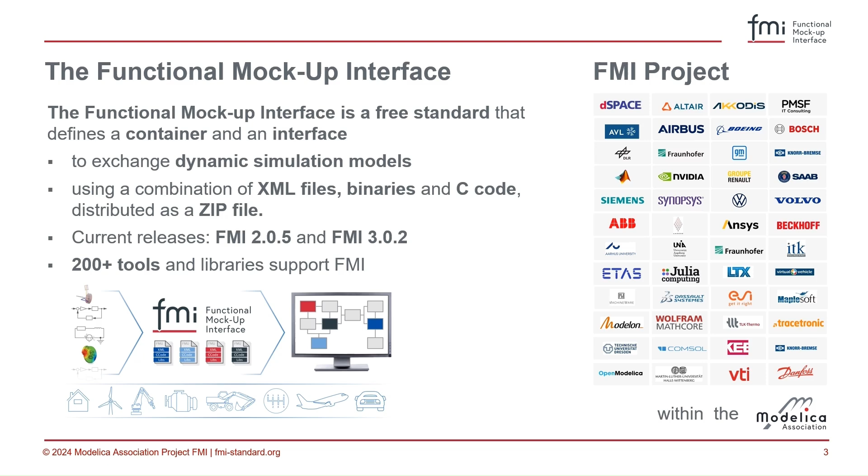While FMI 2 is still broadly used, FMI 3, which was released 2 years ago, brings important improvements. These were driven by the advanced usage of FMI in new domains beyond the classical continuous dynamical system simulation, such as virtual ECUs, advanced co-simulation, AI models, and optimization.

You can categorize the new features into performance and accuracy improvements, such as event mode in co-simulation, and features for new applications, such as grouping of signals in terminals. And some features belong to both categories, such as clocks to synchronize discrete events, new variable types as needed to represent embedded software, binary variables, and arrays. And very important for today's talk is the preparation for domain-specific extensions in the form of layered standards on top of the core FMI standard.

In order to keep the core FMI standard manageably small, we have foreseen in FMI 3 extension mechanisms for new applications. They can be released in form of layered standards on top of the FMI standard and can be defined not only by the FMI project, but by any organization. In the FMI project, we currently develop 4 of them for XCP support, for structured data, network communication, and validation experiments and related files.

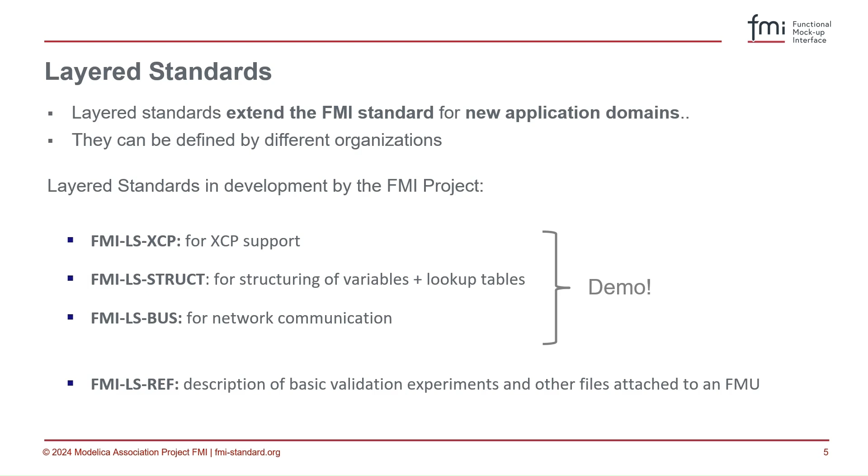FMI LS XCP defines support for the XCP protocol from ASAM. The first version of this layered standard was just released this week at the FMI design meeting in Munich. A2L files are packed into the FMU together with a manifest file that describes the capabilities with respect to XCP support. Then a measurement and calibration tool can automatically connect to the FMU representing a virtual ECU instead of the real ECU.

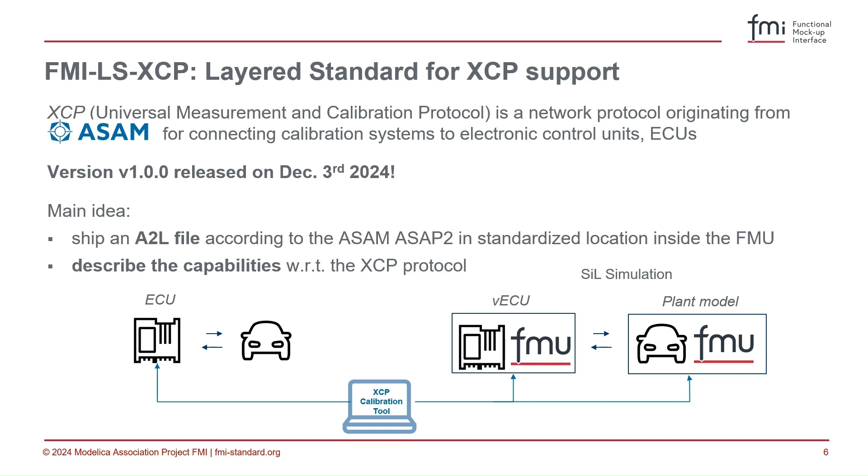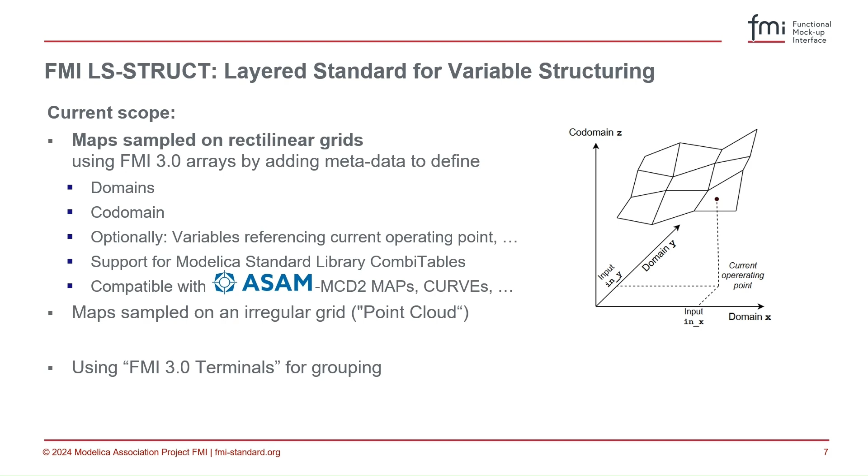FMI LS-Struct is a layered standard for the structuring of variables. Especially it describes how to use several FMI 3 array variables to represent maps that are sampled on rectilinear grids. In 1D and 2D, this corresponds to maps and curves in the corresponding ASAM standard. Also other kinds of variable groups, such as maps on irregular grids, can be defined. The FMI 3 terminals are used for the grouping.

FMI LS-Bus describes how to realize network communication for virtual ECUs with FMI 3 features, such as clocks, terminals, and binary variables. Especially the protocols CAN, LIN, FlexRay, and Ethernet can be defined. It uses the given network description files, such as DBC, LDF, FIBEX, or ARXML. Two variants have been defined. The high cut uses physical signals and clocks on the transport layers. The low cut defines the emulation of specific bus systems to realize virtualized bus driver implementations.

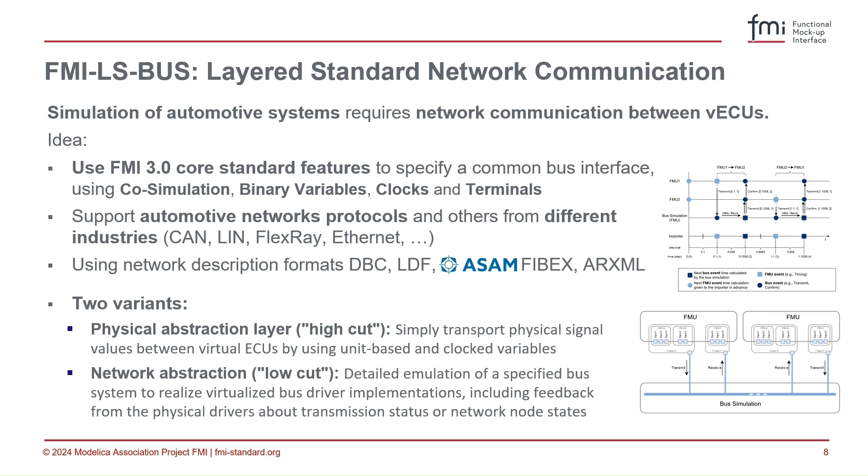FMUs with FMI LS-Bus support can be simulated in three ways. On the left, we see the simulation of two virtual ECUs with an idealized bus in a one-to-one connection. This can be simulated in a standard FMI importer without special bus simulation capabilities. To simulate bus effects, two variants are possible.

In the middle, we use a bus simulation FMU. With this, a standard FMI importer with no special bus simulation capabilities can be used to simulate bus effects for multiple connected virtual ECUs. On the right, we see a simulation tool with special bus simulation capabilities to simulate the bus effects.

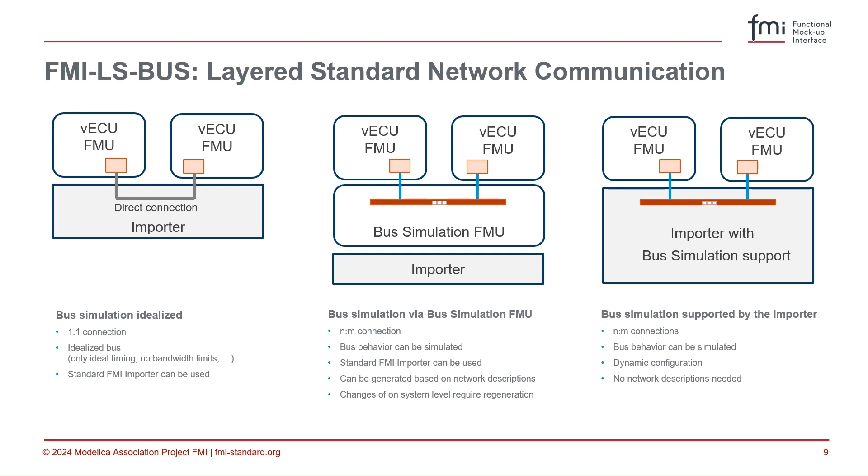We will now demonstrate the high cut with an example for the closed loop simulation of a fuel injection system with an engine control unit and a transmission control unit. It will be presented by Klaus Schuch from AVL.

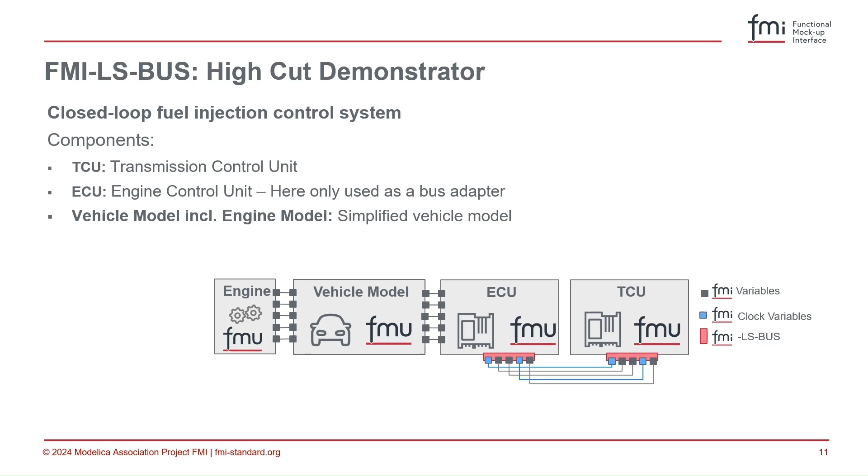Hello, my name is Klaus Schuch from AVL, and I will now show you how to build up a high cut example in our generic co-simulation tool Model.CONNECT, which has a few extensions to support the layered standard for network communication, also called LS-Bus. The example is based on the example that was built up in the Smart Systems Engineering group of prostep ivip.

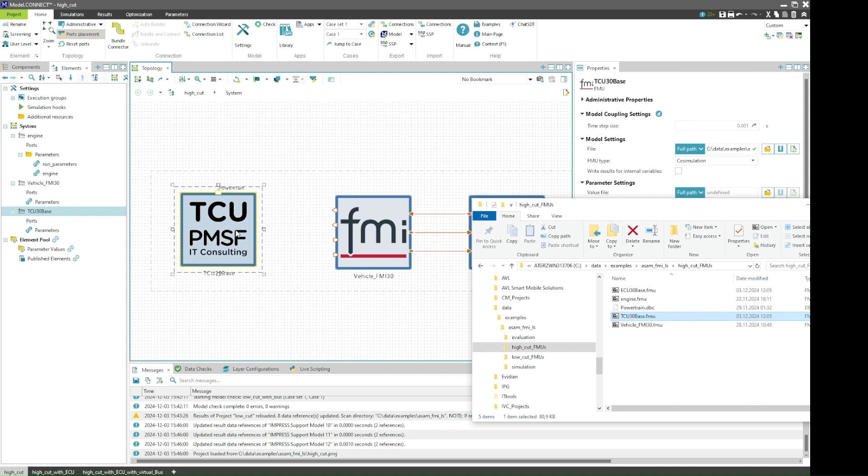So I have already started the example here with a vehicle and an engine, and I will now add the first virtual bus component, which is a transmission control unit provided by PMSF. I will connect it directly, this is one possible use case, to the virtual ECU.

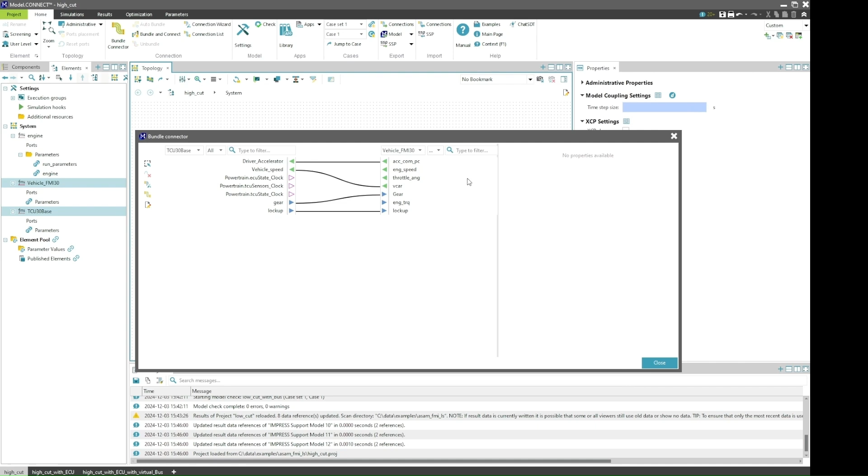I use our suggested connections, connect them. The names are not perfectly aligned, so I will connect them manually. Names could have been renamed, but I can also show you how to directly connect it. So the model is now set up, and I can just start a simulation.

One of those FMUs is showing log messages, but let's now see the results. Let me reload the results, and you can see the transmission unit created gear shifting points, and we see how the gear shifted. The vehicle speed can also be seen.

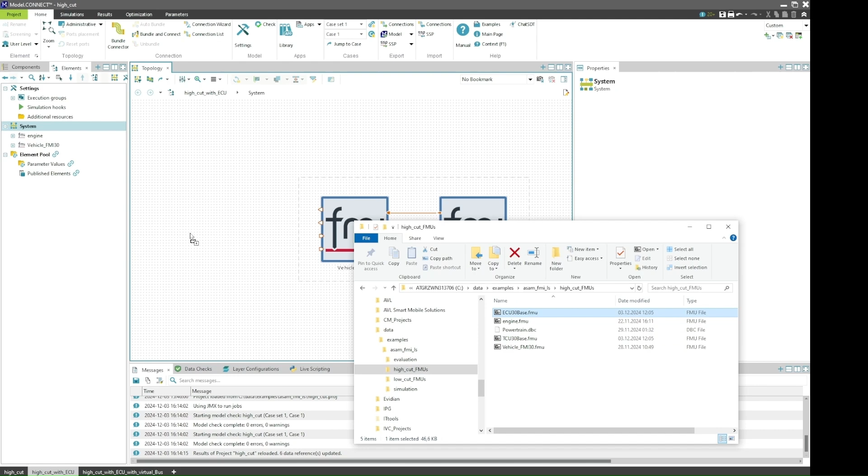To show the functionalities of the layered standard better, we will now build the very same example, but with a second FMU that functions as a bus adapter, so that the plant model is not connected directly to the transmission control unit, but the transmission control unit here connects directly via the bus to the adapter FMU, and we connect this adapter FMU now to the plant model.

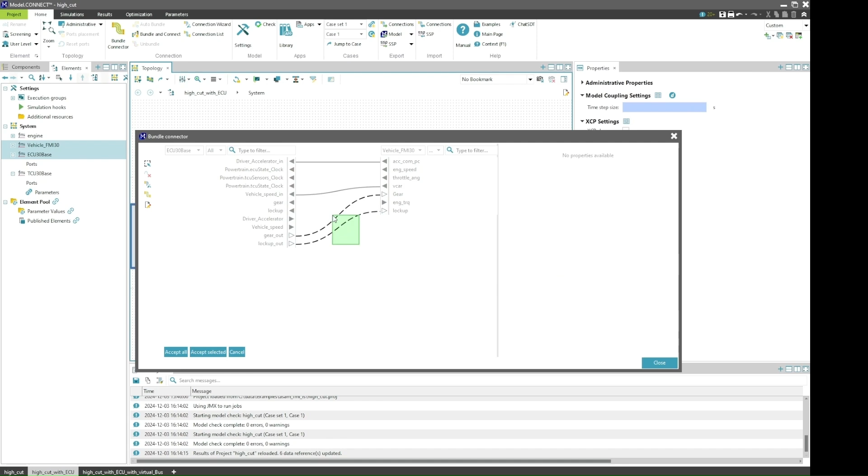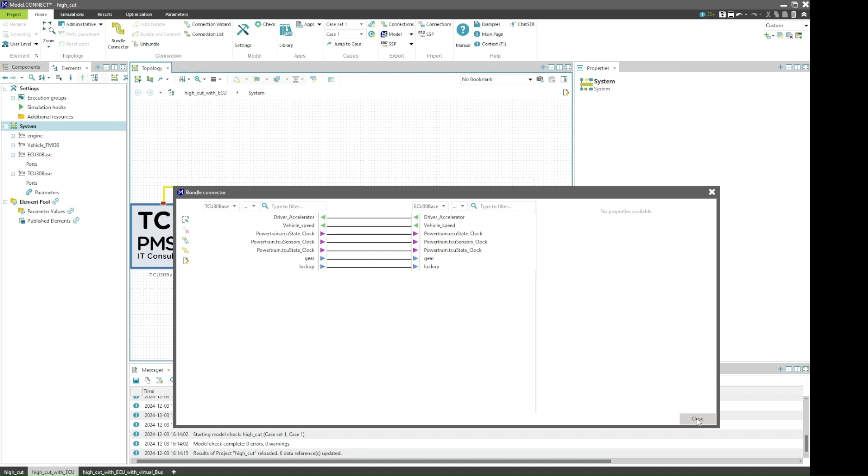Can use the suggested connections. Let me reorganize this a bit to have it better looking. So, the interesting thing here is now what happens in the bus. Those are the bus signals, and all of those bus signals are transmitted at different clocking points. And let's just look at the simulation again.

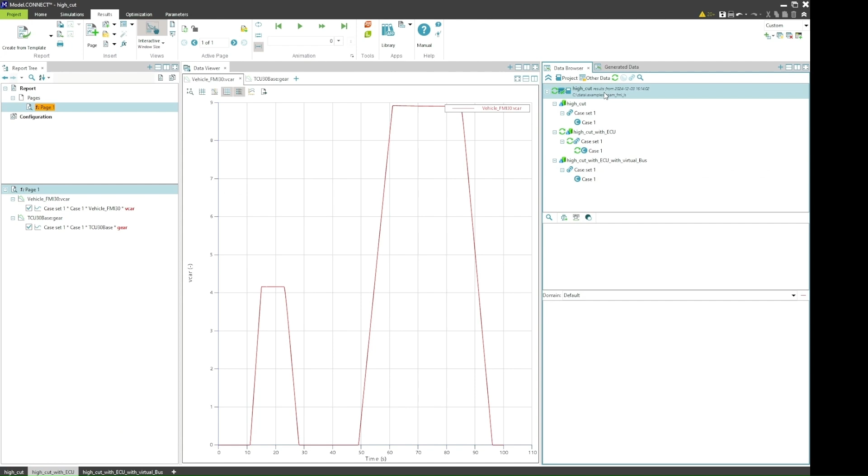One of those FMUs again gives some output, and we can see after reloading the results, we get the same profile. For more complex models with several FMUs, those direct connections might be confusing. Therefore, we also have the option to create a virtual bus component.

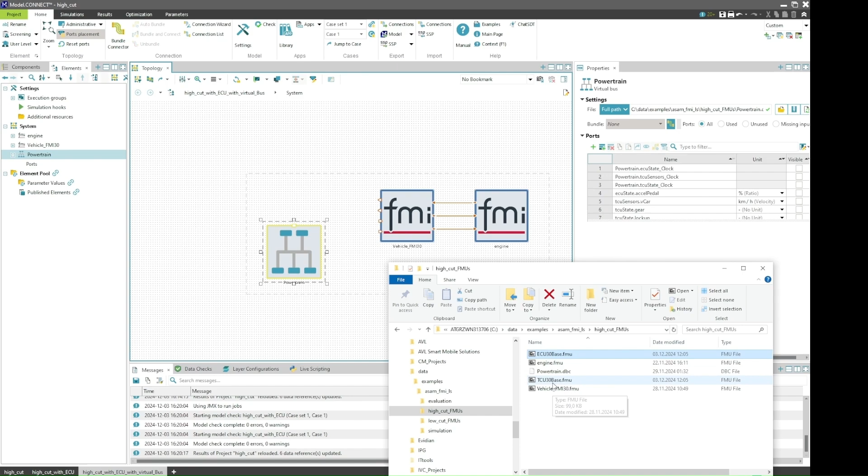I do this just by drag and dropping a DBC file into that, and now I can add the very same ECUs, very same FMUs here again. But I will not connect them directly, but instead connect them via the bus. Let's move those connections over here.

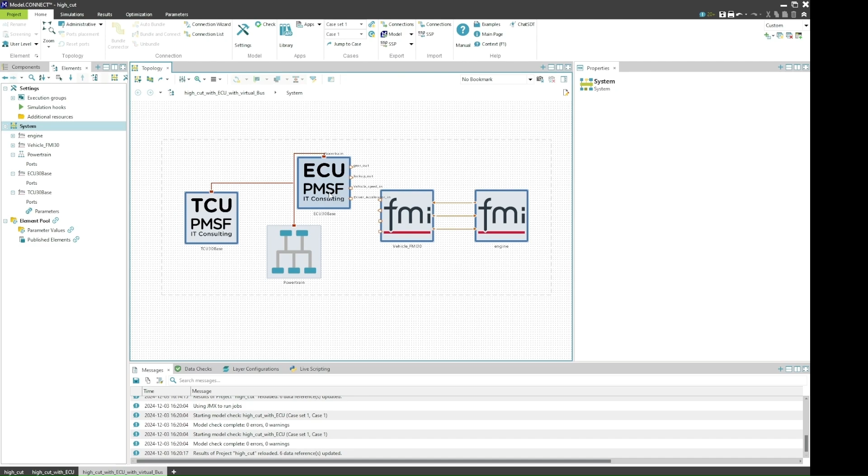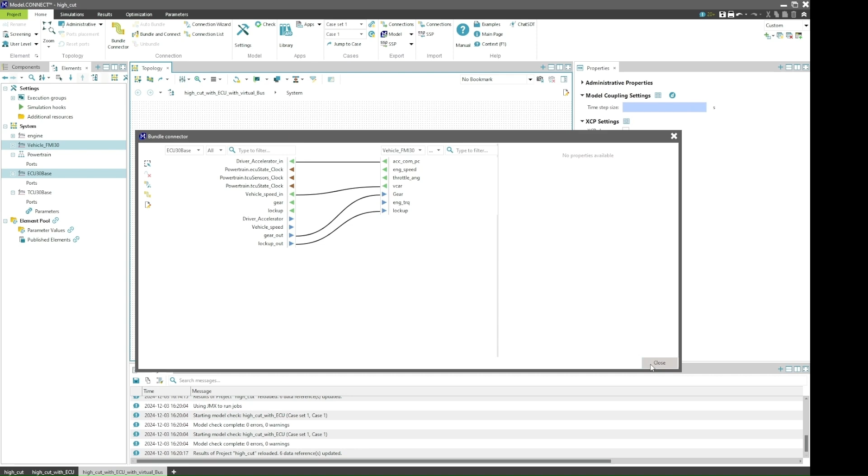So I connect this TCU to the bus, and I connect the ECU to the bus, and connect those via the suggested connections, acceleration, and speed, as before.

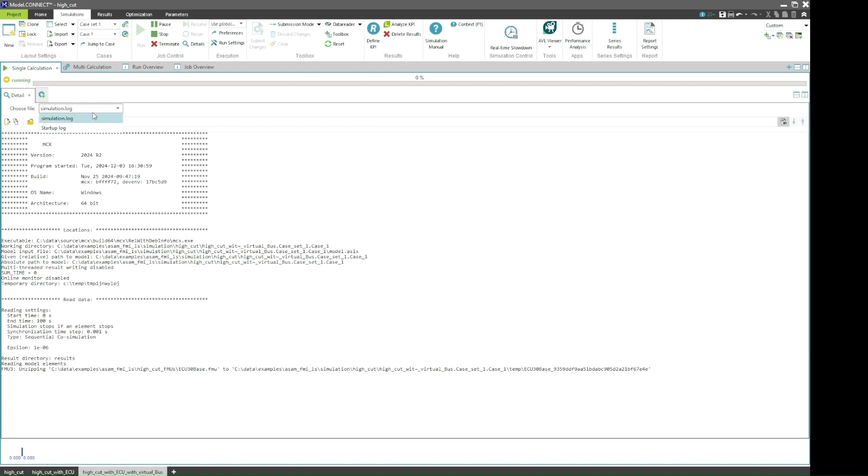You can now see the connectivity in the end is basically the same, but the connections are all going through the bus, which in this case is an ideal bus, so there are currently no delays whatsoever. If I now simulate this, I will get the same results. So the connectivity is just done in a different way, but the simulation in the end is the same.

The FMU of this example also supports another layered standard, the layered standard for structuring of data. In this case, the parameters of this FMU can be seen here, and this FMU also exposes lookup tables. FMI on its own cannot represent lookup tables, but with the layered standard LS-Struct, this can be done. And you can here see several lookup tables for the gear shifts. Such lookup tables are in the A2L standard of ASAM called maps.

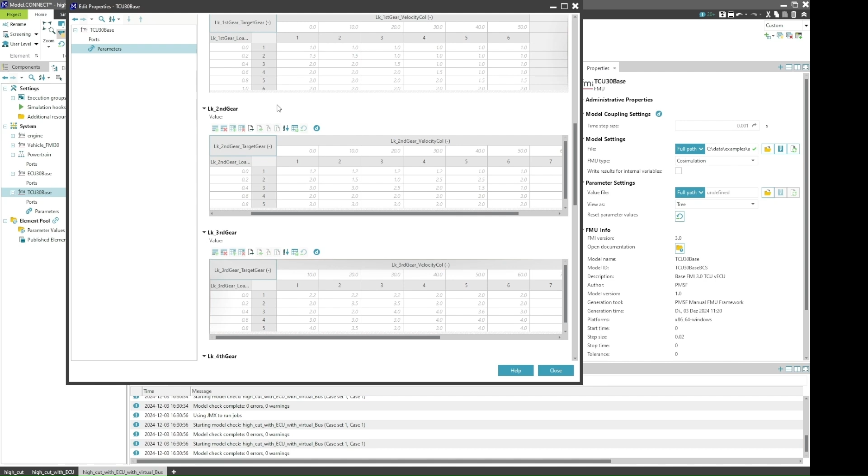These parameters can now be set at the beginning of the simulation or even changed during simulation if the FMU supports LS-XCP as well, or if, like here in this tool, we can expose any tunable parameters of any FMU via the XCP interface, and then you could connect during runtime and change those parameters if they are tunable.

I will not show the XCP during runtime. This will be shown in other demonstrations later on. This was my short presentation of the high-cut LS-BUS and a short peek into the LS-Struct.

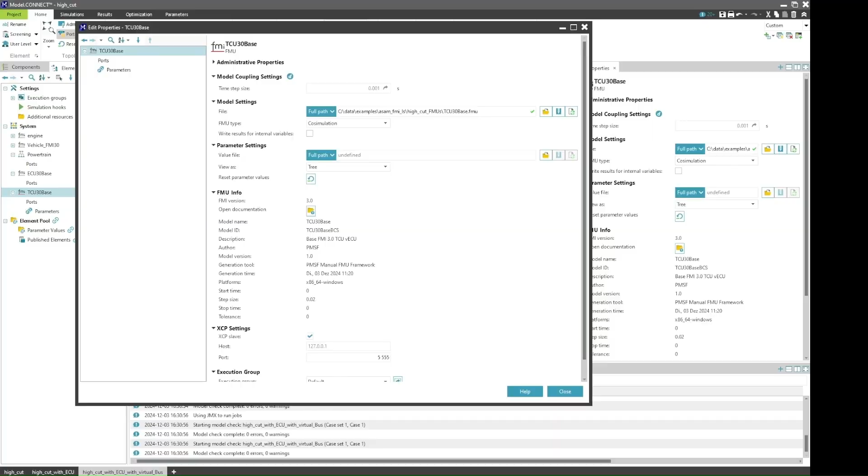I will guide you in the next couple of minutes through our demonstration series. After the showcase of the high-cut communication, we will focus now on the low-cut implementation of the layered standard. Low-cut in this context means frame level transmission, in this case of the CAN bus.

For this purpose, we created a virtual vehicle setup which will show you the flexibility of the FMI and the layered standard for network communication. On the left side of the block diagram, you can find the engine and driver model of the vehicle, which is a standard FMI3 FMU and acts as an environment model.

In the middle, you find the main component called controller. This controller is a full-fledged AUTOSAR virtual ECU, including the respective base software components and network stack provided by dSPACE. This includes PDU router, CAN interface, and many more within this FMU.

For the layered standard for network communication, a small FMI LS bus driver is built in the FMU and acts as an interface out of the main features of the FMI3 standard for clocks, binary variables, and terminals. As a second communication node, you can find the display provided by Bosch.

The display FMU is a restbus model with a simplified non-AUTOSAR CAN logic, connected also to an FMI LS bus driver. This already demonstrates how the layered standard can be used independent from inner software architecture. Also, the layered standard provides header files, which makes the integration and the usage as easy as possible.

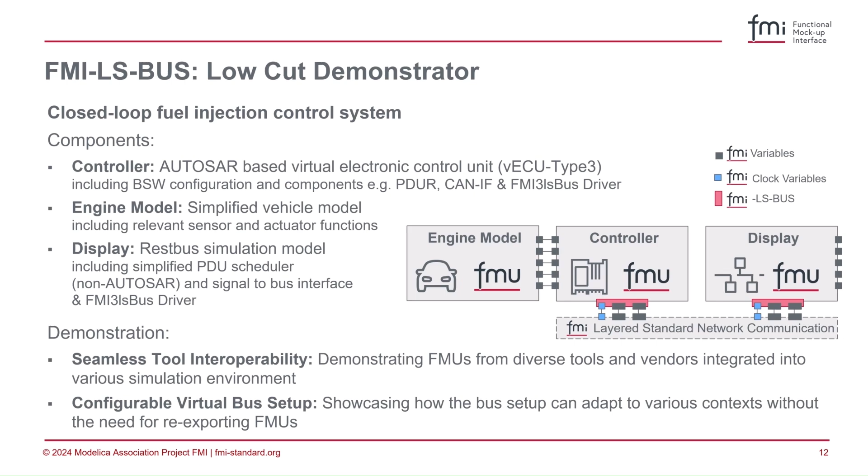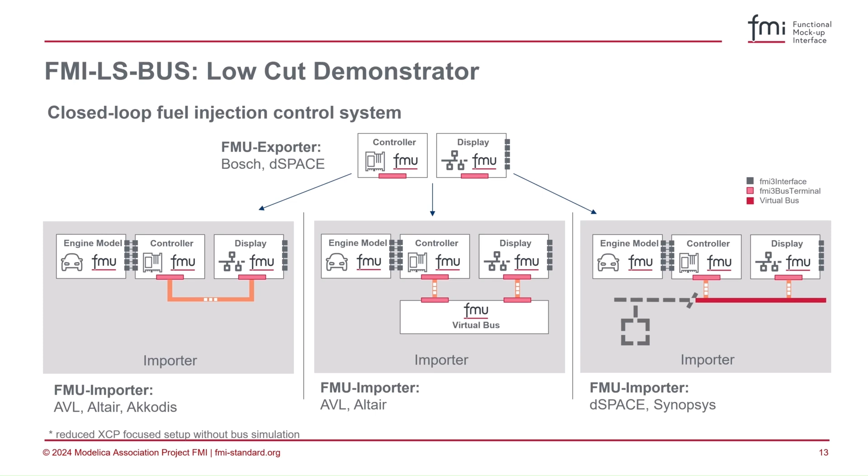But we will now start our demonstration series with the third use case, where dSPACE and SYNOPSYS show how their tools have an integrated virtual bus solution, having access to the bus traffic and can manage as well as route them through the FMI LS bus interface.

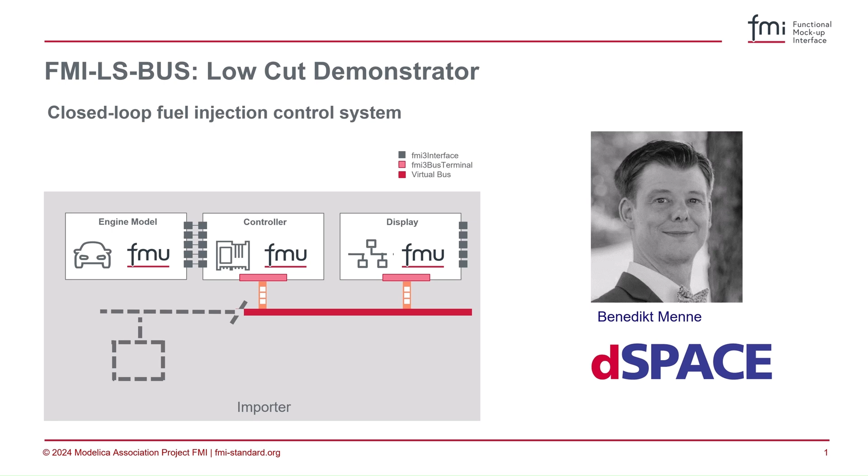In this first part of the demonstration, the AUTOSAR configuration and the export of the controller artifact will be shown with the dSPACE toolchain. After the generation, all of the components will be integrated, simulated and measured within the dSPACE simulation environment. The setup is connected via an integrated virtual bus simulation, which is compliant with the low-cut standard.

In the next few minutes, I will show you how the presented showcase can be realized by using the dSPACE toolchain for virtual validation. For this, we will firstly create the controller V-ECU FMU with dSPACE SystemDesk. After this, we will integrate the complete simulation system with all artifacts by using dSPACE VEOS.

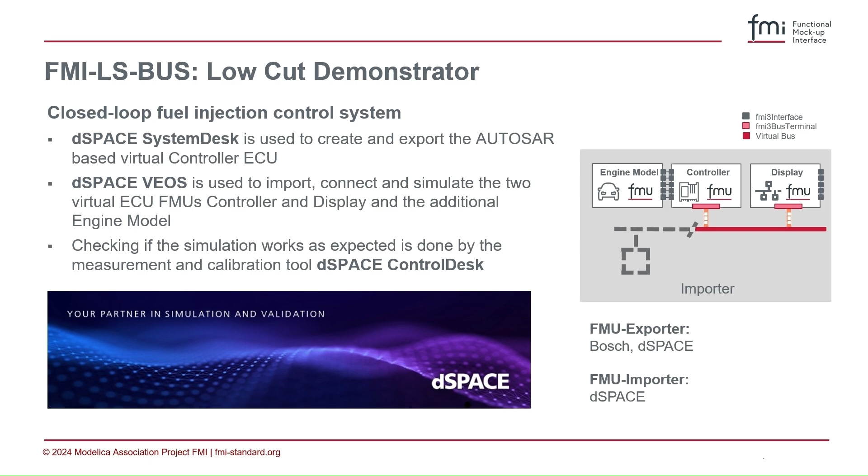And last but not least, we will use dSPACE ControlDesk to show that the whole simulation system works as expected. So let's start creating our controller V-ECU FMU by using dSPACE SystemDesk. I already imported AUTOSAR data and created a system where the application software we want to use in our showcase is mapped. We also see that our ECUs and our network topology are already created.

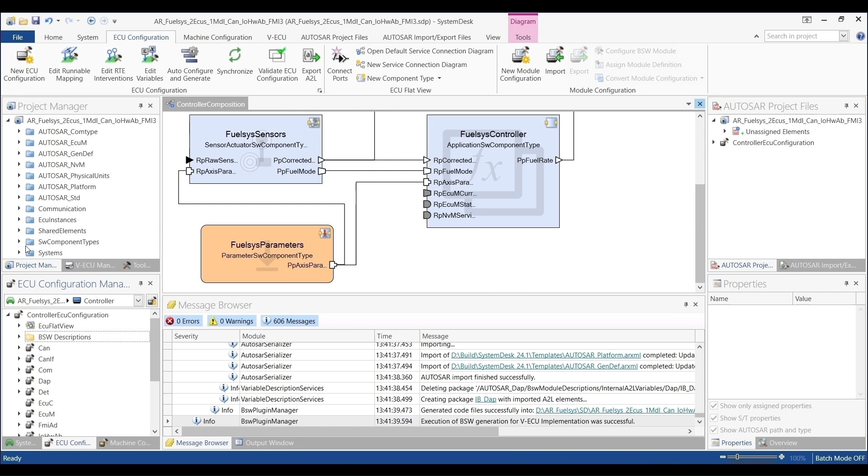I also already added the AUTOSAR basic software modules, which shall be used within the V-ECU FMU. By using SystemDesk, you can automatically auto-configure and generate each of them. So for example, if we are opening the CAN module, then we see that SystemDesk is automatically updated and generates FMI LS bus compatible code for it. So you don't have to do something by hand. The same is done for the XCP module.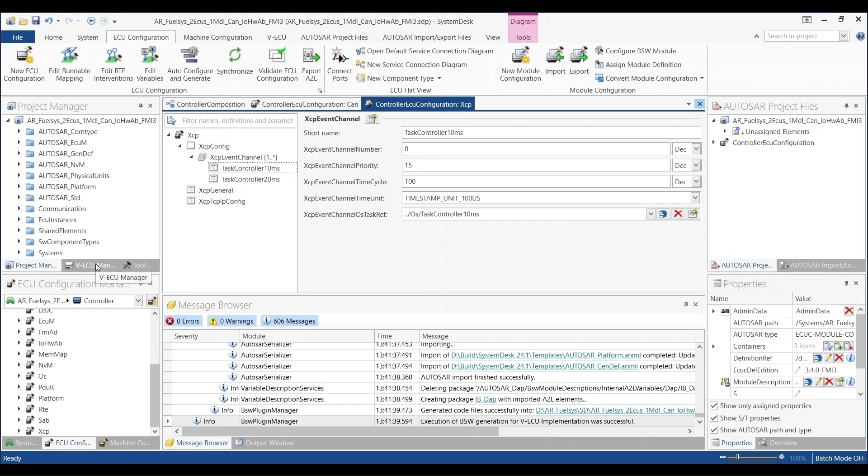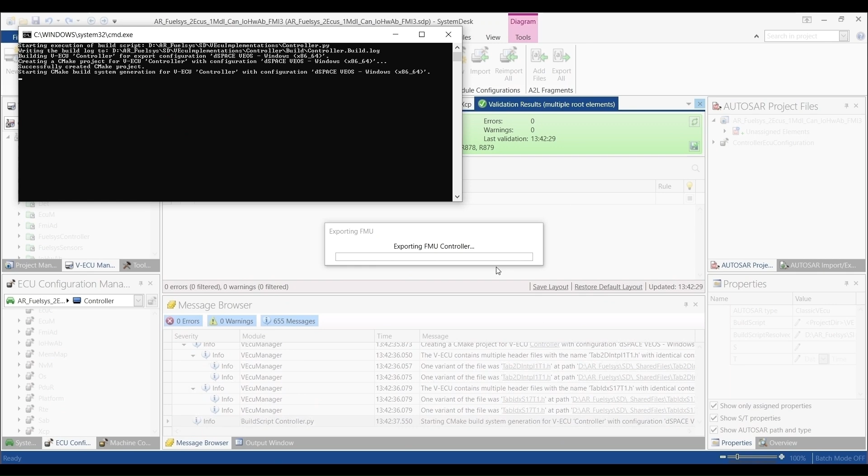In the next step, we will export the V-ECU FMU from SystemDesk. For this, we export the FMU, select the specified platform we wish, and after this, it will be automatically built for us. So if the build is finished, then we can look inside the FMU and see which artifacts are generated.

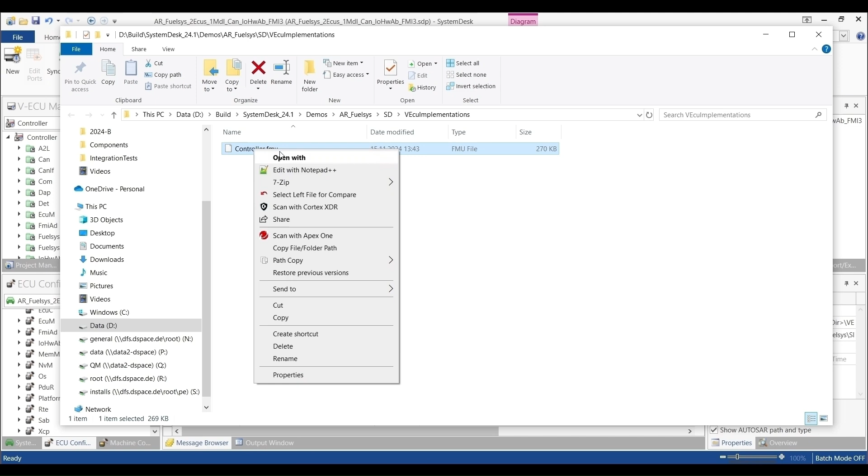We can now open the FMU which was generated by SystemDesk by using a simple zip tool. We see inside that there is an FMI 3.0 compatible FMU, which also includes the layered standard for XCP and also the layered standard for network communication.

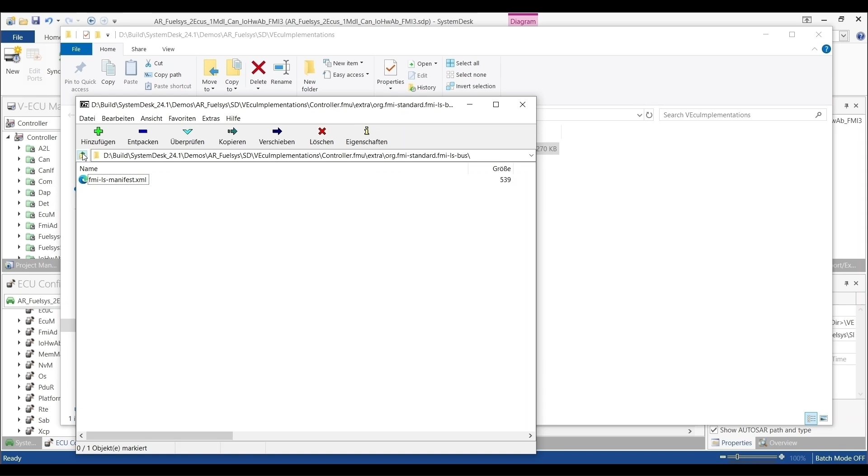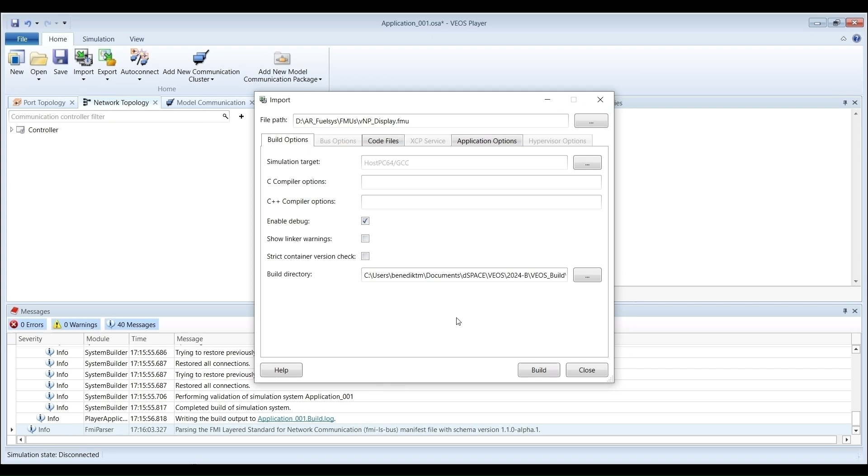To simulate the whole system, we had to import the simulation artifacts into VEOS first. If there is an FMI LS XCP included, you can also configure it during the import of the FMU into VEOS. Now the controller FMU has been imported, and we had to import the second ECU FMU. VEOS automatically detects that each FMU we imported has included an FMI LS bus, so you can directly connect it via the bus feature set of VEOS.

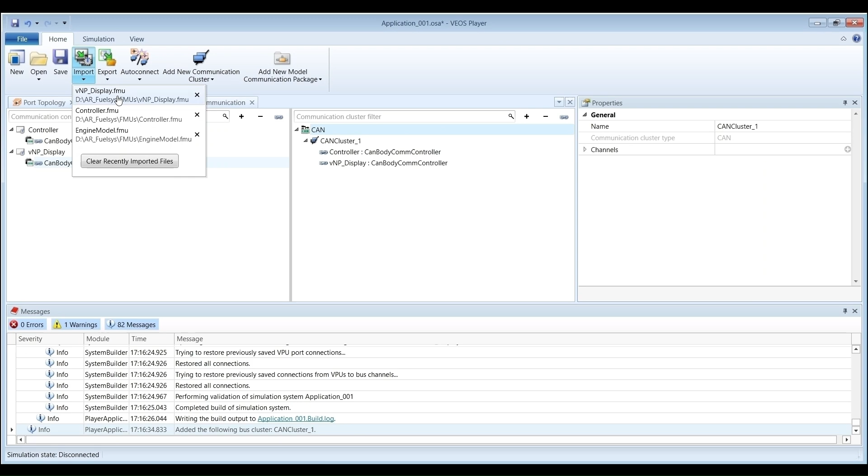Now we have to import our environment model, which is called engine model, for our simulation system. So after the import is finished, we have to connect the FMU variables of the environment model to the FMU variables of the controller V-ECU FMU. Now everything is prepared and we can start our simulation.

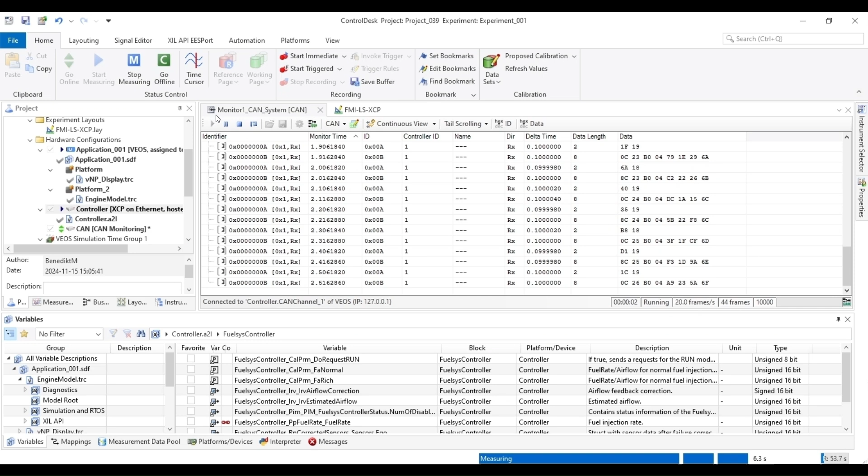After we start the simulation, we could use dSPACE ControlDesk to measure and calibrate the specified A2L variables that are provided by the FMI LS XCP. For this, we start the measuring. And after the measuring starts, we'll firstly see the bus traffic that happens within the whole simulation system. And also we see the measurements of the A2L variables.

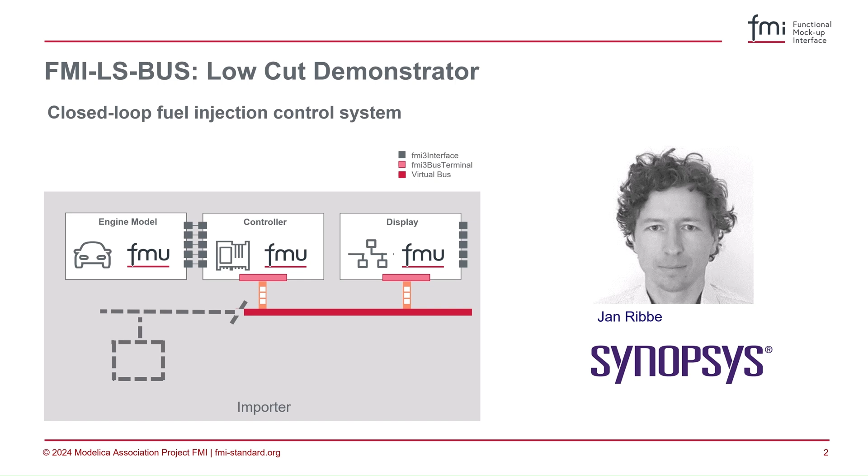Now Synopsys will follow, showing how to connect and simulate the same artifacts without reconfiguration or generation. Therefore, the Synopsys simulation environment, also with an integrated virtual bus simulation, will be used. This will also demonstrate the interface independence of the layered standard from different tool and virtual bus vendors.

Welcome to the Synopsys demonstration of Silver's generic FMI3 support. We focus on the layered standards for buses, LS bus, and for XCP, LS XCP, that will be introduced in future Silver versions. The main purpose of this demo is to illustrate how external FMUs can be easily co-simulated with Silver. The shown setup features 3 participants of different origins, an engine model and a controller from dSPACE, and a display model that has been provided by Bosch.

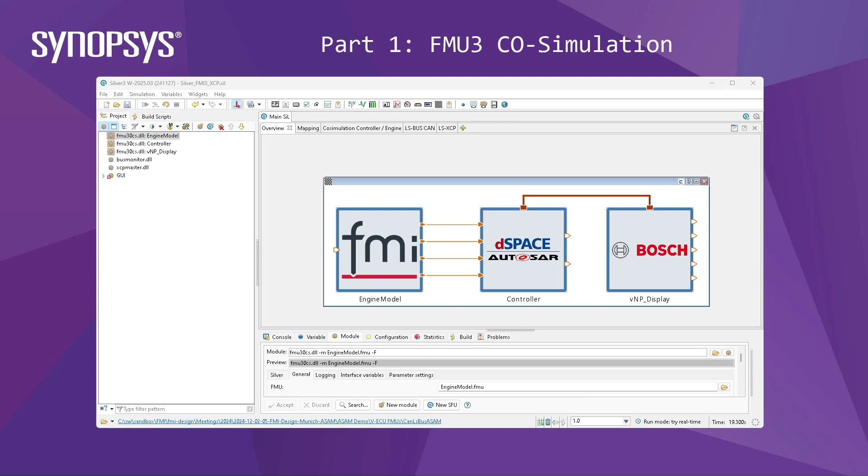Engine and controller are coupled by a default signal interface, and the controller and the display are coupled by a low-cut LS bus CAN indicated by the red arc above in the picture. The implementation is straightforward. Choose Silver's fmu30cs module and point to the FMU of interest, as illustrated here on the engine model. Let's get the simulation running.

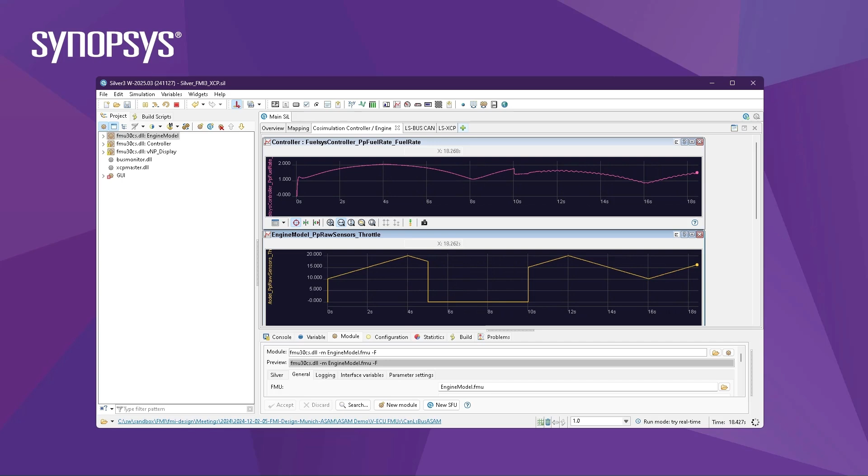Naturally, some signals are not yet connected properly, so we should implement rename rules or just map interactively in the GUI. Notice that no red cross remains once everything has been connected. Now that these signals are connected, we can check how the controller and the engine co-simulate. Therefore, we can check, for instance, the fuel rate, and we can see that there are interactions between the engine and controller. The fuel rate of the controller is plotted above, and the engine throttle value is plotted below.

Now let's focus next on LS bus. Let's have a look at the LS bus implementation between the controller and the display now. We start the simulation, and one can see there are no real inputs between the controller and the display. Messages are relayed through Silver's own SVB CAN bus implementation for the LS bus. With the bus monitor active, we can log messages to our console. Inside the console, we can see the timestamp, the sender, and the payload.

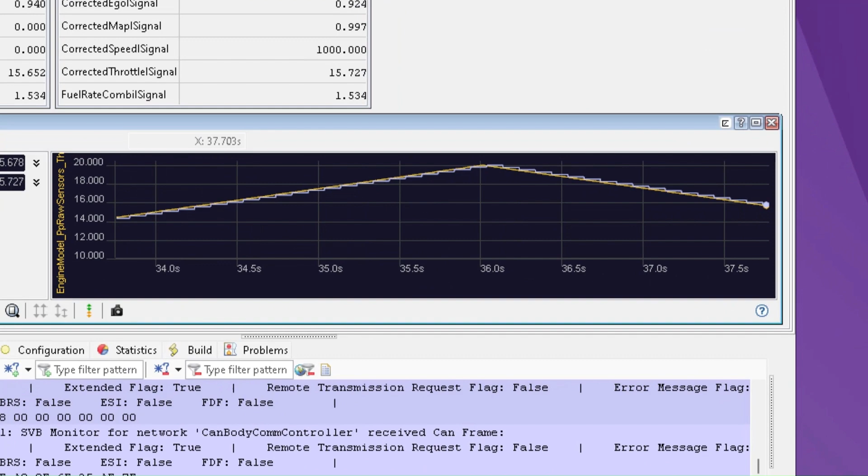Of course, we can also check the signals received on the display directly. Let's have a look. Here in yellow, we see the original signal, and in blue, the received one via LS bus. And one can even see the bus artifacts based on the transmission.

Finally, let's focus on XCP, which the controller has equipped as well. That means internal labels can be accessed via XCP communication. There are easier ways to access A2L labels of a module in Silver, but for the sake of demonstration, we take our XCP master module in this case. But first, we need to tell Silver's module the correct configuration.

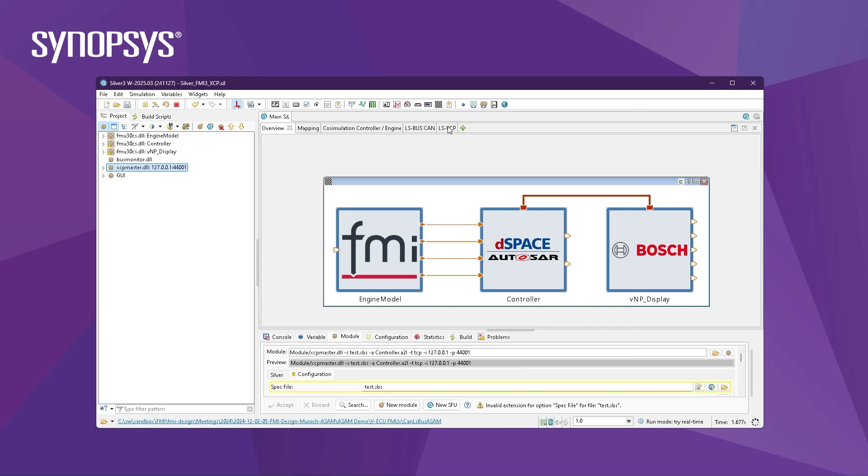Okay, TCP localhost and port 44001 is correct. That's fine. Now let's activate it, and we can compare here one signal that is exposed, which is called throttle. The purple one is the received signal, and the yellow one is the original. And as you can see, the shape is very, very similar. This completes Silver's FMI 3 demonstration.

Akkodis will now focus on the XCP measurement use case alone, showing that the FMUs can be used in different contexts and for different use cases. Therefore, the LS-XCP compliant component within the controller will be used to measure and calibrate internal variables.

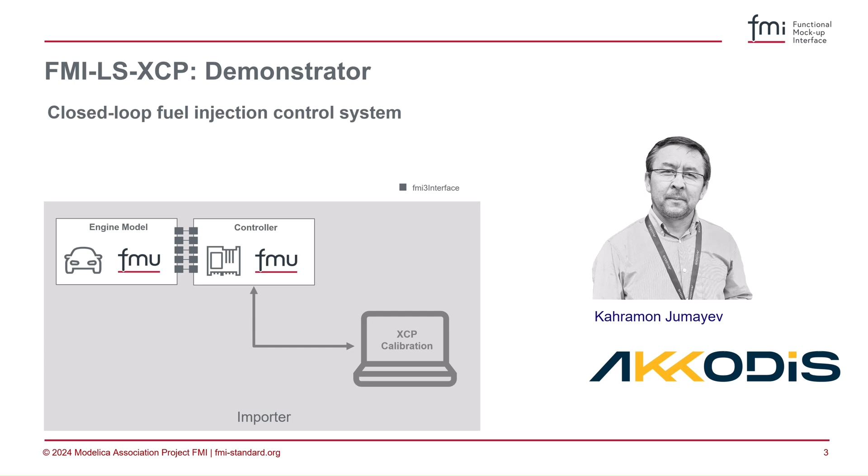Hello everybody, my name is Kahramon Jumayev. Today I present FMI layer standard for ASAM XCP protocol with PROVEtech toolsuite from Akkodis. Here's a general overview about PROVEtech toolsuite and demo. PROVEtech supports all of the FMU models based on new FMI and FMI layer standards for virtual testing and validations.

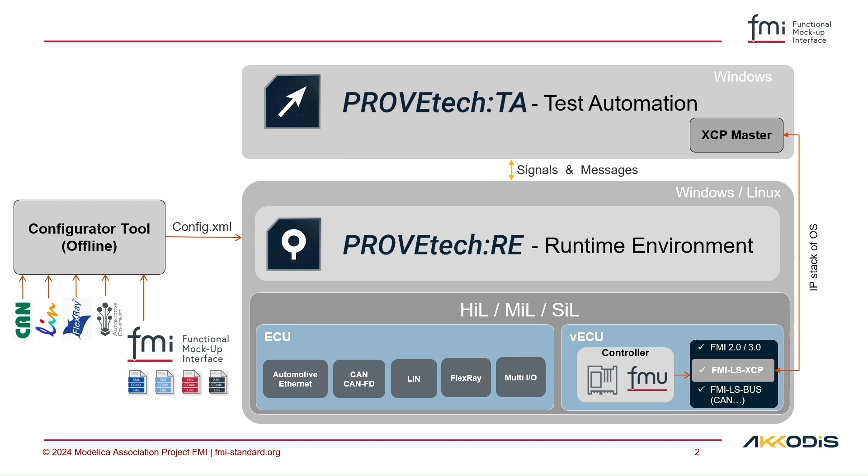To demonstrate this showcase, I use a controller virtual ECU FMU exported by dSPACE SystemDesk tool, and this FMU has an integrated XCP service and is implemented according to FMI layered standards for XCP. The goal is to show how to configure and import such FMUs into PROVEtech:RE runtime environment and make a measurement and calibration with XCP protocol over IP using PROVEtech:TA test automation tool. Let's get started with real demos.

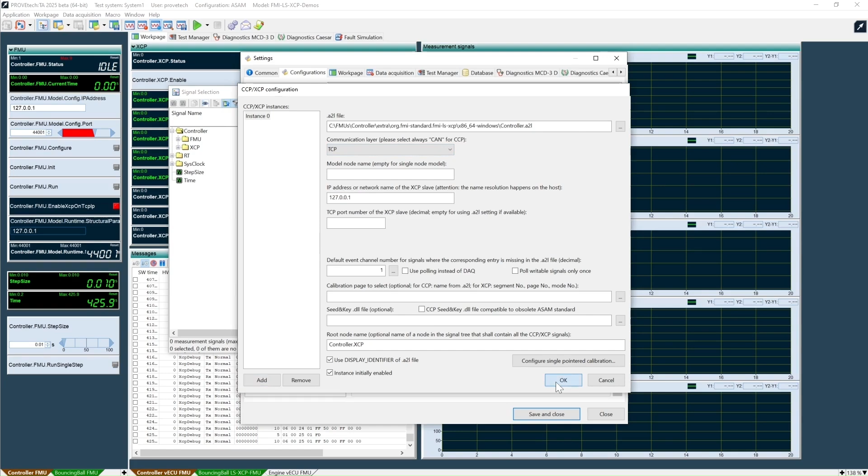The configuration of the virtual ECU FMU is rather simple. It's XML based and it's loaded as a normal FMU model into the tool. And the XCP settings are also straightforward. We have set the path to A2L file and choose the transport protocol, TCP or UDP, and start the rest with default settings. So once we loaded the model, all variables and parameters from the A2L file and from the FMU model description file are registered as signals, just like any other signal of your hardware in the loop or software in the loop system.

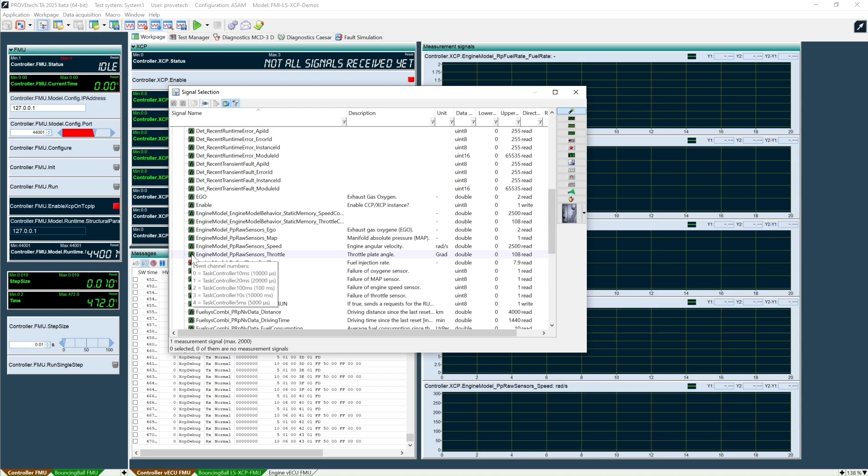Additionally, we have tool-specific signals to start the simulation, run it continuously, or run it in single steps, similarly to start or stop the measurement. Now let's measure some signals from our controller virtual ECU FMU and start the XCP communication. For that, we need to add some model signals into the measurement. Multi-rate measurement of the signals is possible, and we start the data acquisition and run the model.

So now we see the signals' measurement values also in the chart controls as plots. And the message window shows the communication between the XCP master and the XCP slave inside the controller virtual ECU FMU. Similarly, we can stop the XCP communication and start again, stop the data acquisition, and save it into the file for further analysis. So this is a short and very high level overview about FMI layered standard for XCP with PROVEtech toolsuite.

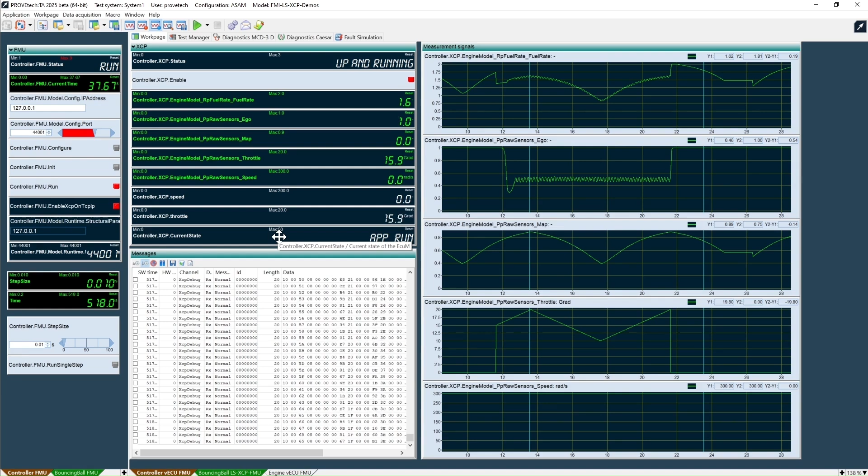Now AVL will show the missing two LowCut configurations within their tool. In the first part, the direct communication use case will be shown where the CAN frames will be directly transmitted between the two FMUs. And in the second step, the setup will be enhanced with a so-called bus FMU, which acts as a routing module.

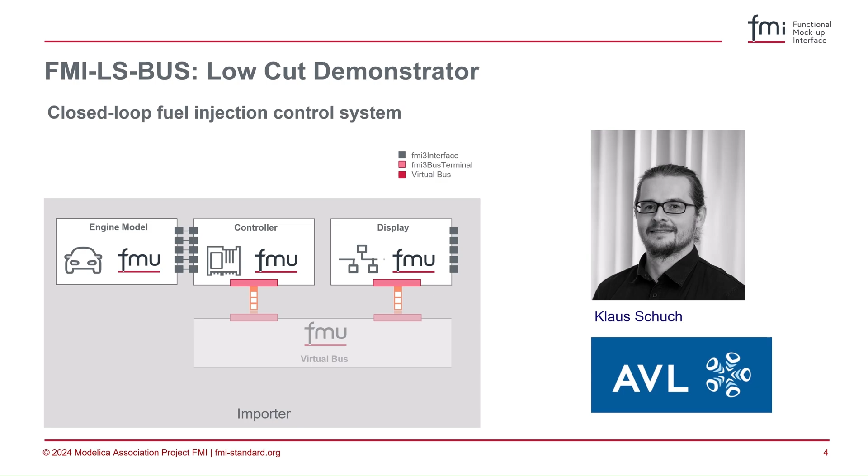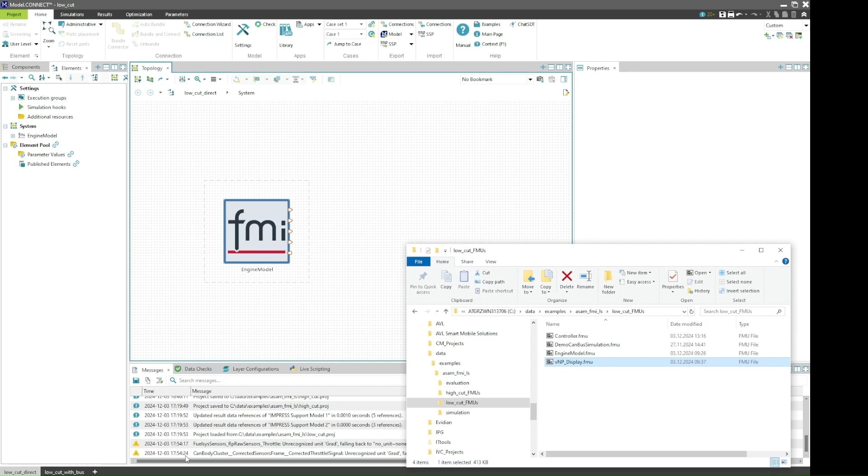Hello, I'm Klaus Schuch from AVL. I will now show you how the LowCut example can be set up in our generic co-simulation tool Model.CONNECT, which has a few extensions to support the layered standard for network communication. For this, I will take the FMUs that were generated in previous videos. First, the FMU created by dSPACE, which represents a controller.

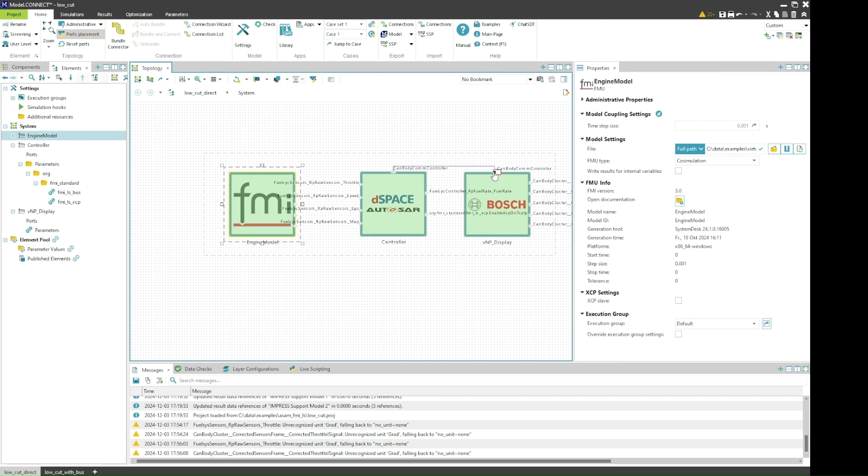Then I add the FMU created by Bosch, which represents the display, and the display and the controller get connected via the bus. I can connect them directly. You see that based on the matching rule of the layered standard, the clocks and the data ports are connected automatically. Now I can connect the engine to the controller. For this I will use our bundle connector. Take the suggested connections. Since the names are similar, I can use those connections. I will just move this port so that it looks a bit nicer.

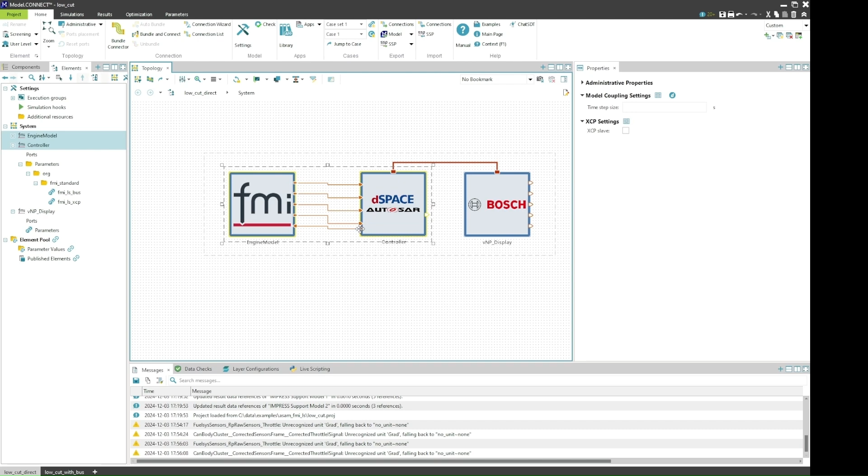And now I can simulate the model. On the right hand side, you see the log file, and on the left side, you see the simulation output directly of a few signals. One of those FMUs, the display FMU, was configured to send warnings with the actual content. This is just done here for debugging. You see that the CAN frames get sent.

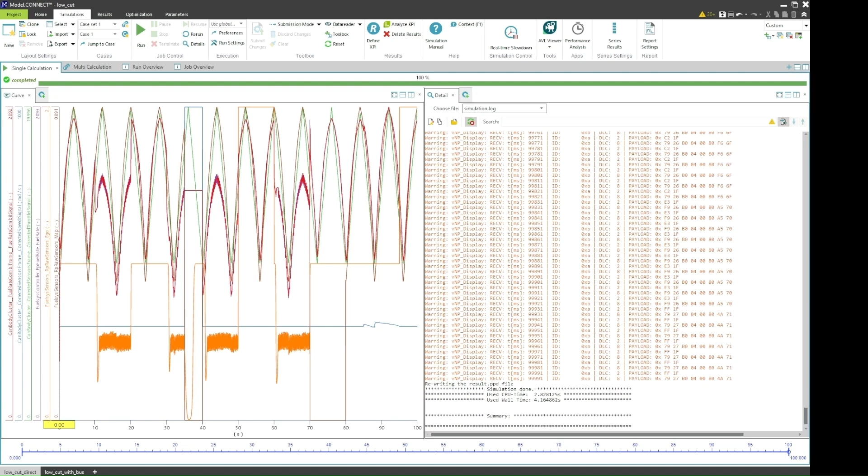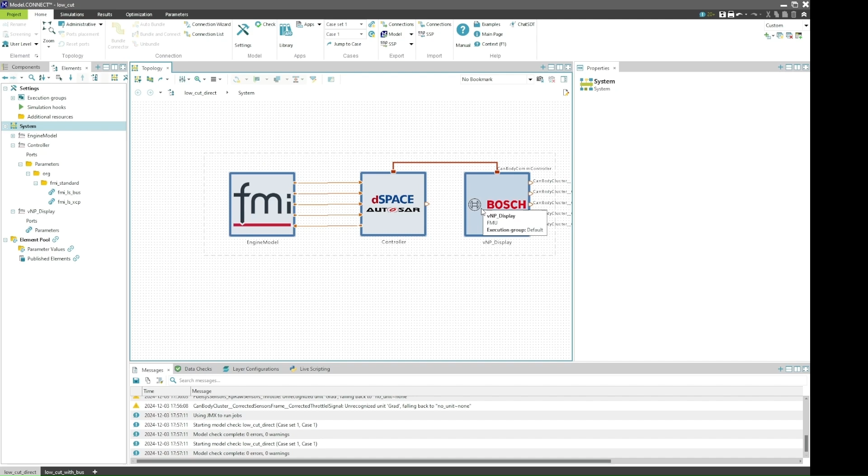We can now have a quick look into the results, and I already zoomed in here, and you can see typical effects of CAN bus communication, where we have sampling effects, for example, here. For more complex examples, direct connections are not always possible, and we need something like a bus simulation FMU. I will show this now as well.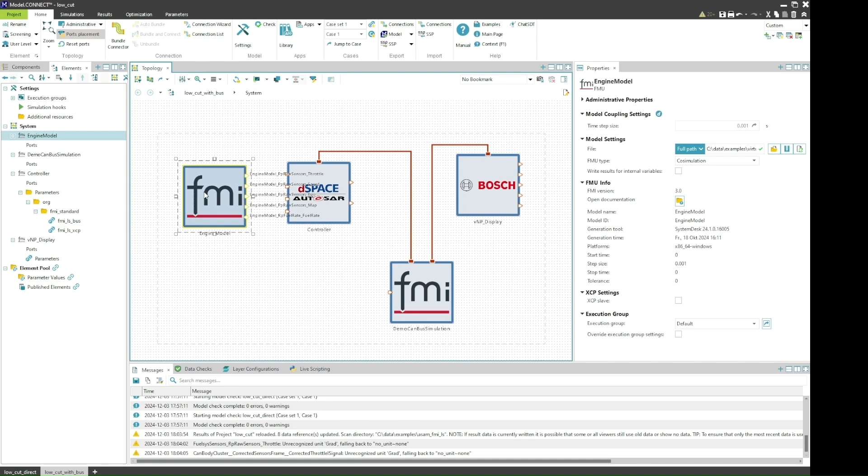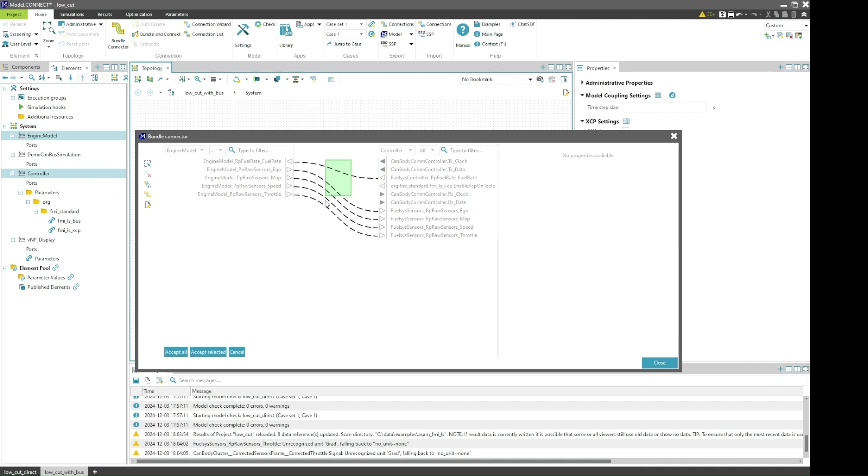I will add a bus simulation FMU, the same controller as before, and also the display as before. Now I connect the controller to the first node of the bus, connect the display to the bus FMU, and I connect the controller to the engine. And now I can have a quick look at the connections that were done, again by matching rules to the first node and to the second node.

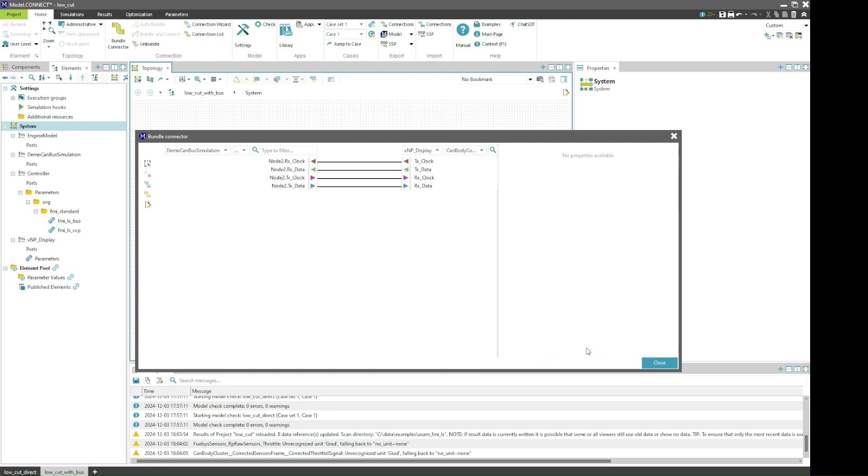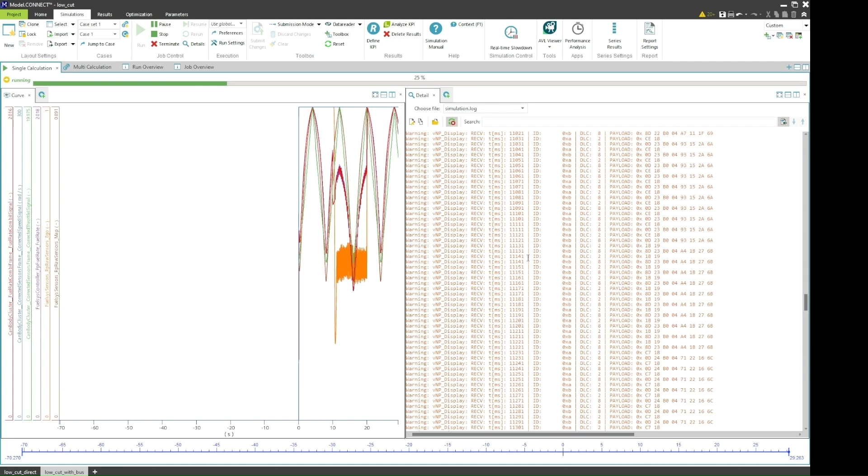And if I simulate this now, I will get the same results as before, because the bus simulation FMU was configured to simulate no delays and also no bus failure. We look at the results, and if I zoom in here, we see very similar sampling effects as before.

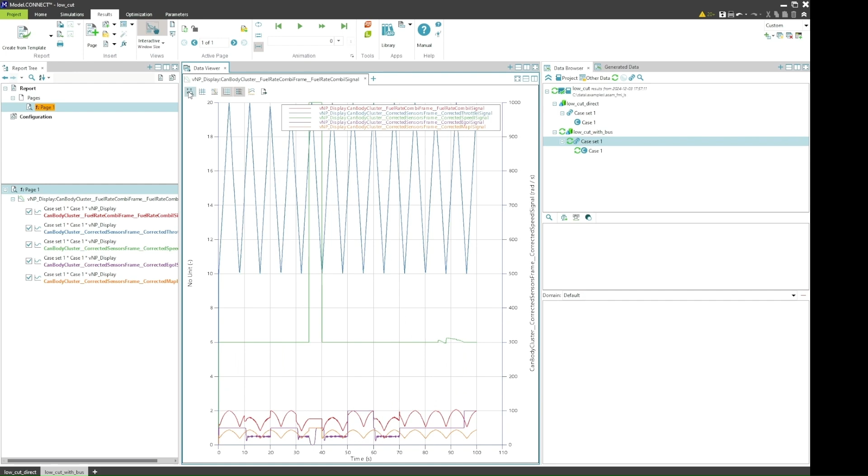Okay, thank you. This was my presentation of how the low-cut FMUs can be simulated in Model.CONNECT.

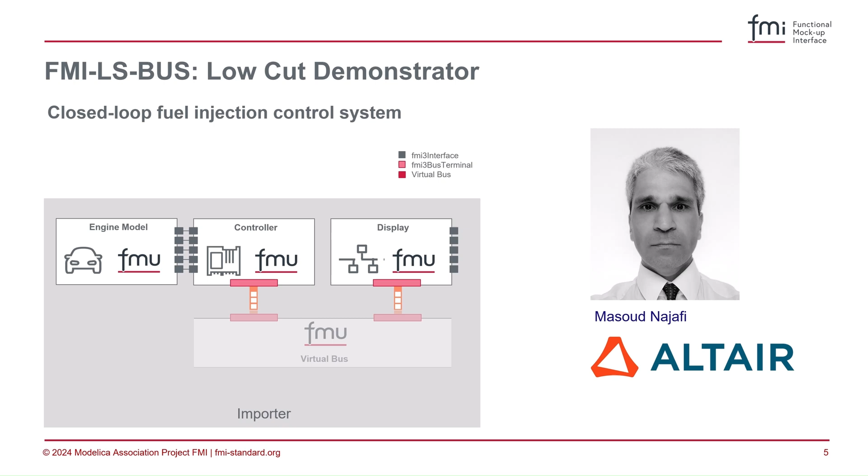The demonstration will be completed with a presentation of Altair, wherein the direct as well as the bus FMU use case will be shown. Please keep in mind, across all demonstrations, we use the exact same artifacts, which demonstrates the interoperability of tool vendors, configuration, and even use cases.

Hello everyone, I'm Masoud Najafi from Altair, and I'm going to present Altair Twin Activate for the simulation of FMI LS-Bus, or layered standard for network communication. Twin Activate is a general-purpose tool for modeling and simulation. This tool is a general tool, and there is no specific support for automotive buses or XCP standards.

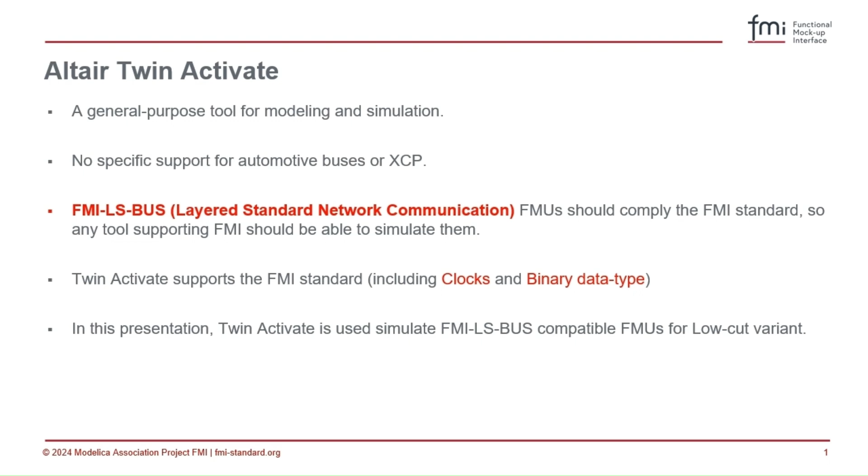FMI LS-Bus, or layered standard for network communication, is a standard based on the FMI standard, which means that any LS-Bus FMU should comply with the FMI standard. So any tool supporting the FMI standard should be able to simulate these FMUs. Twin Activate supports the FMI standard, and in particular clocks and the binary data type, which is sufficient for the simulation of LS-Bus FMUs. In this presentation, Twin Activate is used for simulation of these FMUs for low-cut connections.

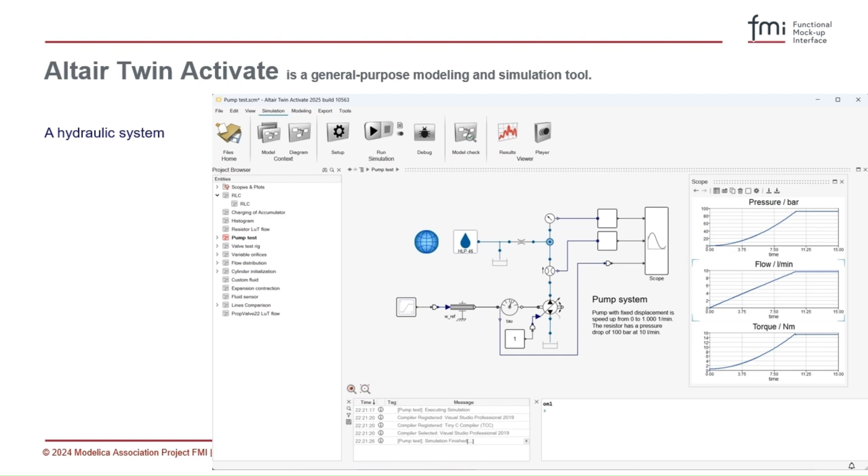There are three FMUs, an engine model, an engine controller provided by dSPACE, and another FMU to display the CAN bus data provided by Bosch. These FMUs are connected either with physical signals like this one, the feedback signal, fuel rate, fed to the engine model, or data connections, the CAN bus data connections, which is binary data to transmit the CAN bus data from controller to the display FMU, and also the clock link for synchronization purposes.

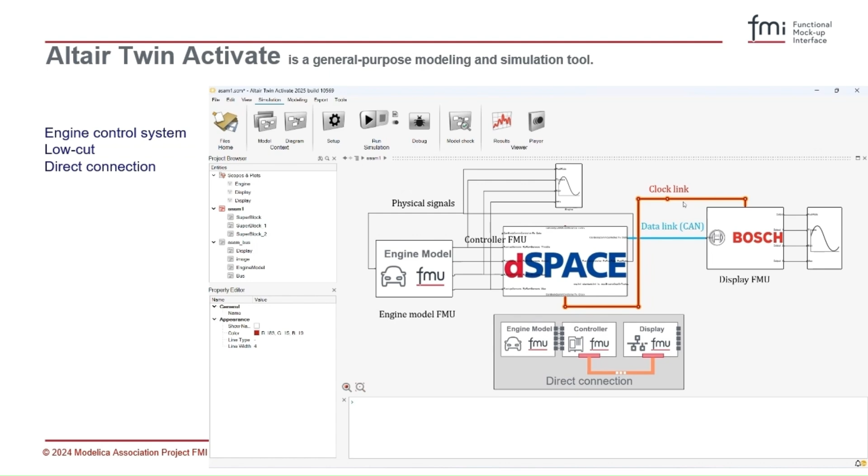If we run the simulation, we can see the signals on the engine side, the physical signals, and also the signals read from the CAN bus and displayed by the display FMU.

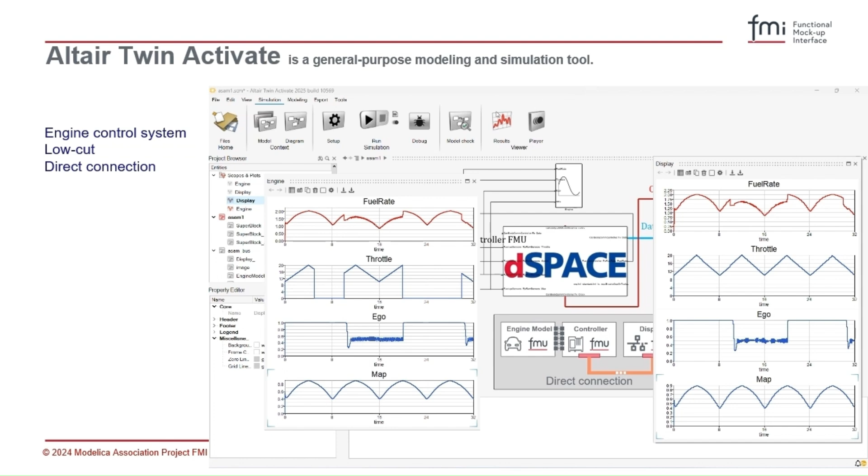The second demo is also for the LS-Bus with low-cut variant, but this time instead of direct connection between the FMUs, the controller and the display FMU, we use an FMU which simulates the bus connection. This FMU receives data from the controller, the CAN bus data, and the clock for synchronization purposes, this red link, and retransmits this data to the display FMU.

If we do the simulation, we see in the scope the signal at the engine side, and at the right-hand side, there's the signal read from the bus FMU.

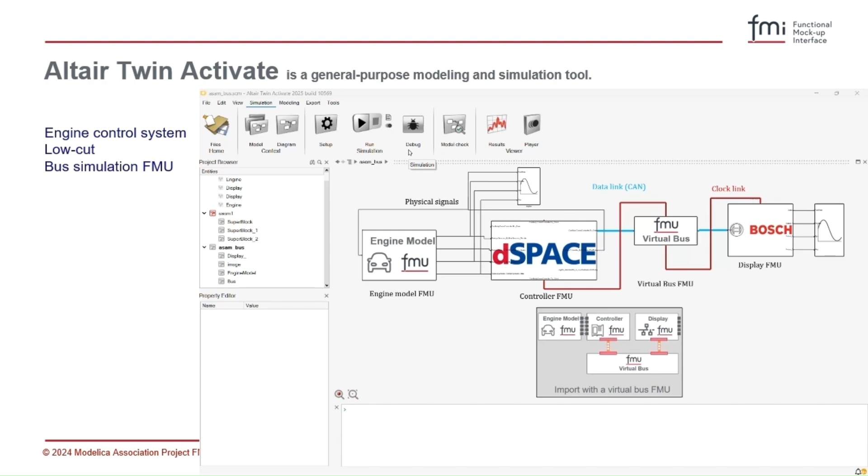Already the core FMI standard can be used for the simulation of simple virtual ECUs. For more advanced simulation, this is not sufficient, but can be extended by layered standards that make use of FMI3 features. And the FMI project has defined 3 of them to enable XCP support, network communication, and structured data such as maps. The benefit is to lower integration costs through better interoperability and more efficient collaboration through significantly reduced coordination effort. This will be a revolution for SiL simulation of virtual ECUs.